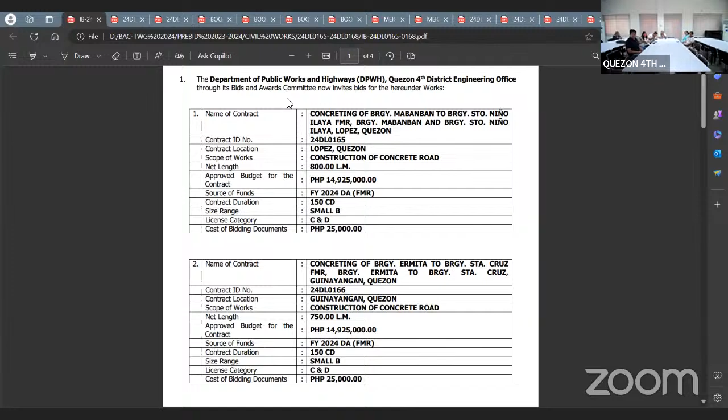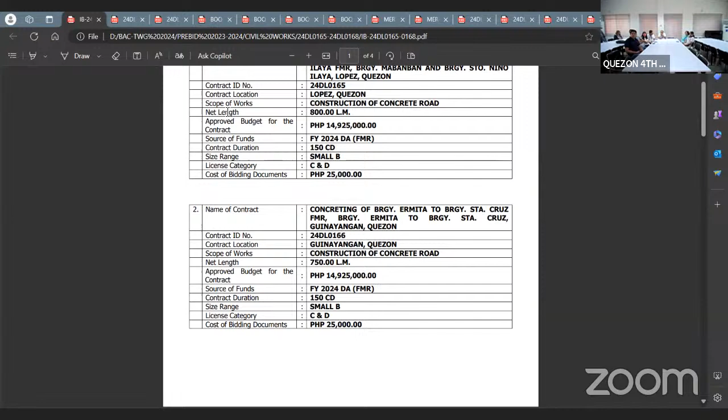Source of funds: FY 2024 FMR. This is FMR for the project. Duration of 150 calendar days, size range small B, license category C and D, cost of bidding documents of 25,000 pesos.

Then second project, 24-0166: concreting of Barangay Ermita to Barangay Sta. Cruz FMR, Barangay Ermita to Barangay Sta. Cruz, Guinayangan, Quezon. Construction of concrete road, length of 750 linear meters, approved budget for the contract of 14,925,000 pesos. Source of funds FY 2024 FMR, duration of 150 calendar days, size range small B, license category C and D, and bidding document of 25,000 pesos.

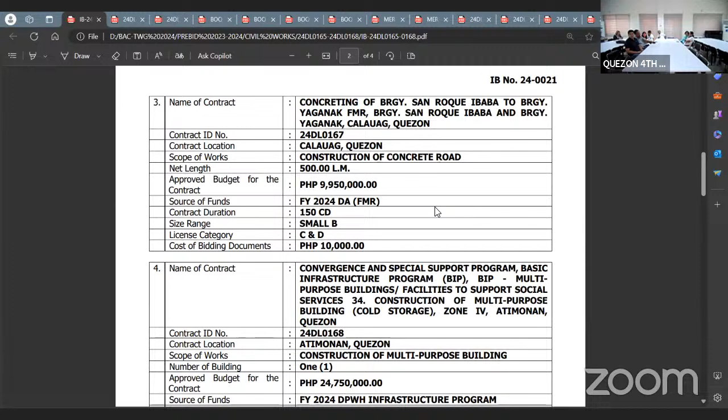Then third project, contract ID 24-0167: concreting of Barangay San Roque Ibaba, Barangay Yaganak FMR, Barangay San Roque Ibaba, and Barangay Yaganak, Calauag, Quezon. Scope of work: construction of concrete road, length of 500 meters, approved budget for the contract of 9,950,000 pesos. Source of funds FY 2024, DA, duration of 150 calendar days, size range small B, license category C and D, and bidding document of 10,000 pesos.

Then last project for this invitation, contract ID 24-0168: Convergence and Special Support Program, Basic Infrastructure Program, Multipurpose Building, Facilities to Support Social Services. Construction of multipurpose building, cold storage, for Atimonan, Quezon. Scope: construction of multipurpose building, number 1. Approved budget for the contract of 24,750,000 pesos. Source of fund FY 2024 DPWH Infrastructure Program, duration of 210 calendar days, size range small B, license category C and D, bidding document of 25,000 pesos.

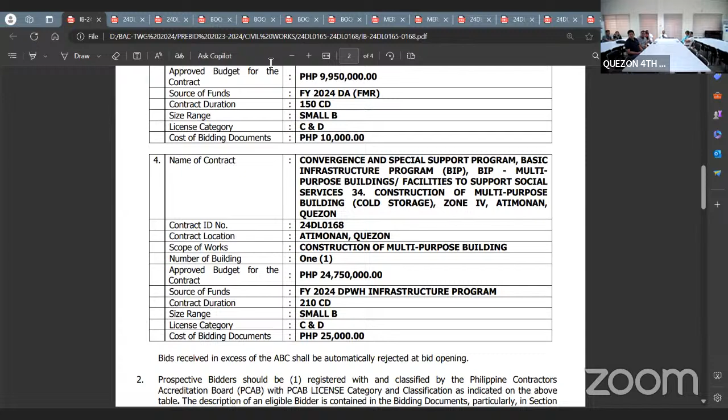Then let's proceed to category support. For our 4 projects for this invitation, 24-0165, 24-0166, and 24-0167, three projects are construction of concrete road. For their major category support, the requirement is road construction, PCCP. For other similar categories: road rehabilitation, PCCP, and road construction tunnel, PCCP. So the projects under the road construction category are 24-0165, 24-0166, and 24-0167.

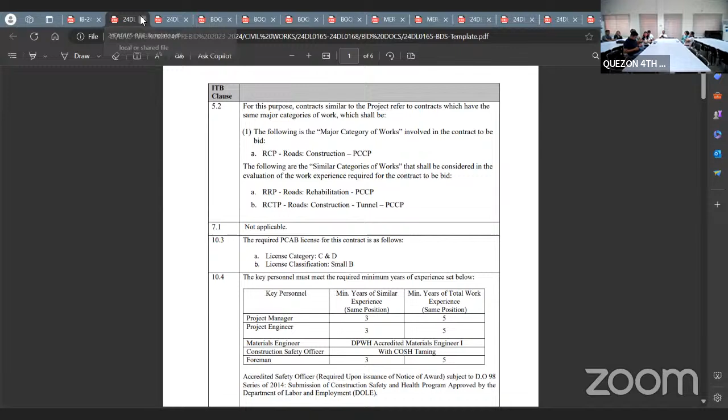Then for 24-0168, the major category of work is multipurpose building, building construction without piles, low rise concrete frame, 1 to 5 stories. For other similar categories of work: building construction with piles, high rise concrete frame, cast-in-place piles, 6 and above stories; building construction with piles, low rise concrete frame, cast-in-place piles, 1 to 5 stories; building construction with piles, high rise concrete frame, driven piles, 6 and above stories; building construction with piles, low rise concrete frame, driven piles, 1 to 5 stories; building construction without piles, high rise concrete frame, 6 and above stories; then building industrial low rise, medium rise, and high rise.

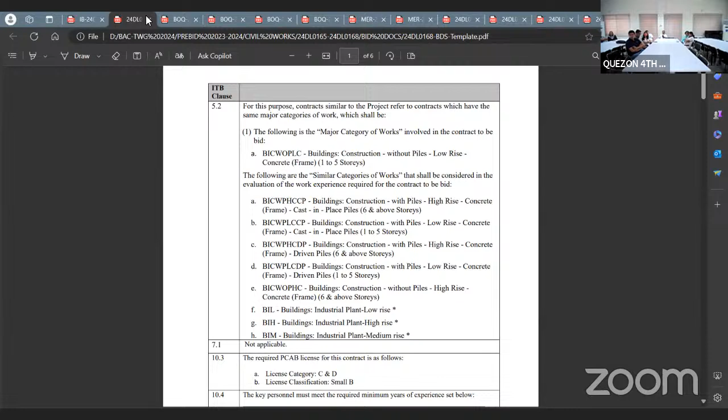For the BOQ of 24-0165, concreting of road length of 800 meters, summary of price: Part A - Facilities for the engineer. B - Other general requirements. C - Earthwork. D - Subbase course. E - Surface course. G - Drainage and slope protection structure. And H - Miscellaneous structures.

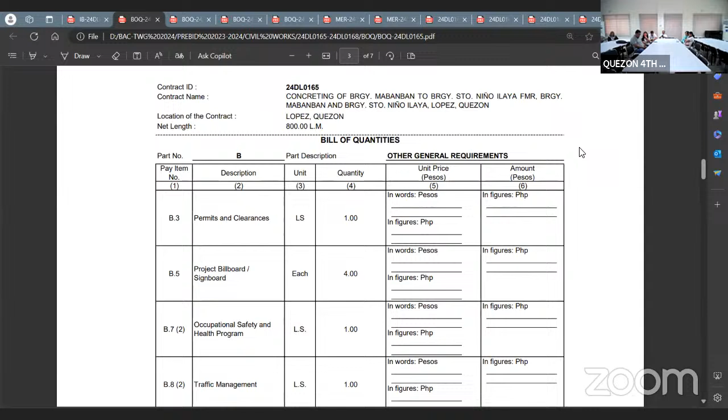So for Part A, we have provision of field office for the engineer, rental basis, provision of furniture, fixtures, equipment, and appliances for the field office for the engineers, provision of 4x4 pickup and service vehicle on a rental basis, and provision of progress photographs. Then for other general requirements, Part B: permits and clearances, project billboard signboard, occupational safety and health program, traffic management, and mobilization/demobilization.

Then for part C, earthwork: clearing and grubbing, surplus common excavation, embankment from roadway, structure excavation, common soil, subgrade preparation, common material.

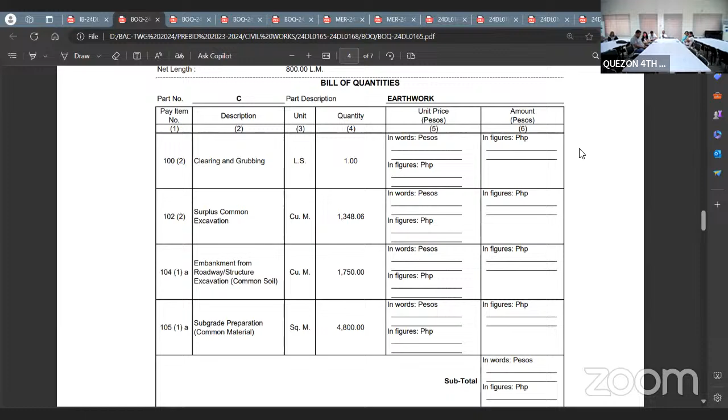Next part is sub-base and base course: aggregate sub-base course, polymer stabilized sub-base, and base course.

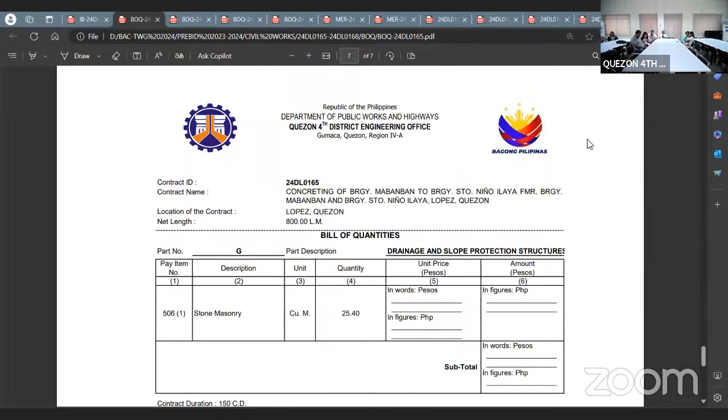Then part G for the drainage and slope protection structure: stone masonry. Then for the miscellaneous structure: kilometer post, precast.

Next, for 24DL0166, for the summary bid price: part A, facilities for the engineer; part B, other general requirements; part C, earthwork; part D, sub-base and base course; part E, for the surface course; and part H, for the miscellaneous structure.

So for part A, the provision belongs to the rental basis: provision of furniture, fixtures, and equipment, office for the field office for the engineer, provision for pickup service vehicle on a rental basis, and provision of progress photography.

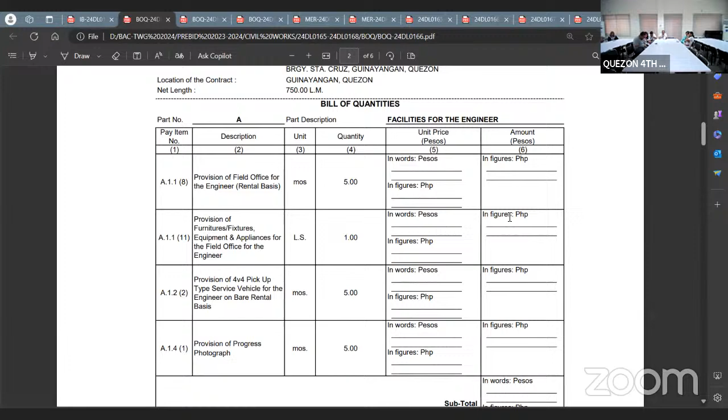Then next, part B: permits and clearances, project billboard/signboard, occupational safety and health program, traffic management, and mobilization/demobilization.

Then part C: clearing and grubbing, surplus common excavation, embankment from roadway, structure excavation common soil, subgrade preparation, common material.

Then part D for the sub-base and base course: aggregate sub-base course, and polymer stabilized sub-base and surface course.

Then part E, surface course: cement concrete pavement unreinforced, 0.20 meters, 14 days. Then for the miscellaneous structure: kilometer post, precast.

Next, third project, 24DL0167. Summary bid prices: part A, facilities for the engineer; part B, other general requirements; part C, earthwork; part D, sub-base and base course; part E, surface course; part G, drainage and slope protection structure; part H, miscellaneous structure.

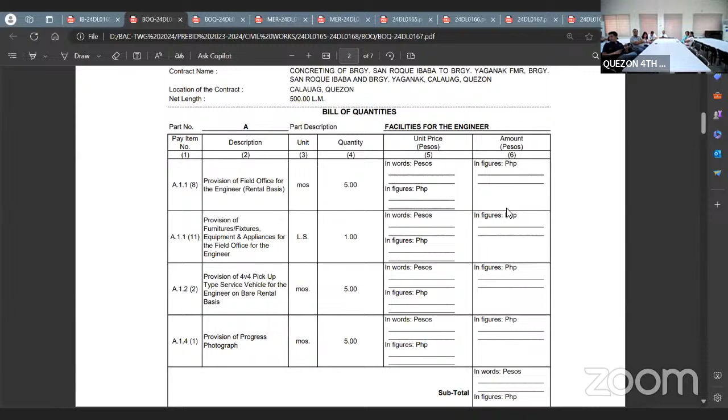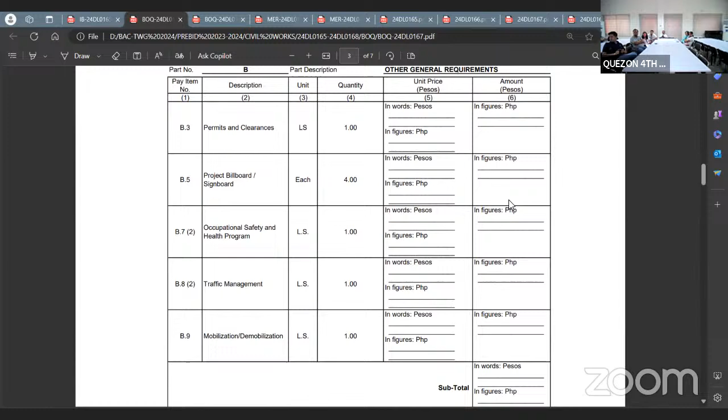So for part A, provision of office on a rental basis, provision of furniture, fixtures, equipment, and appliances for the field office for the engineer, provision of pickup service vehicle for the engineer on a rental basis, and provision of progress photograph. Then part B: permits and clearances, project billboard/signboard, occupational safety and health program, traffic management, and mobilization/demobilization.

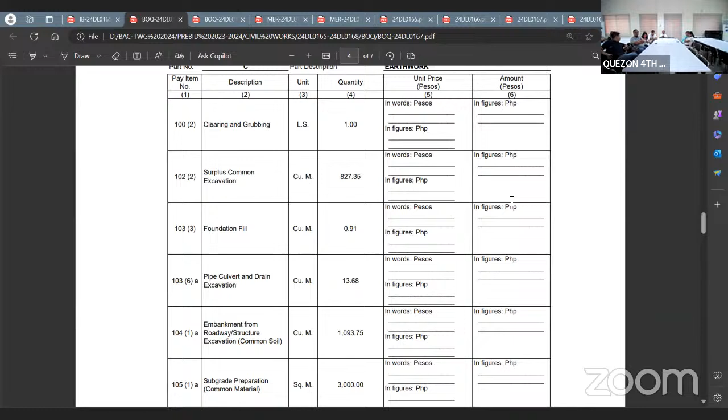Next, part C, for the earthwork: clearing and grubbing, surplus common excavation, foundation fill, pipe culvert and drain excavation, embankment from roadway, structure excavation common soil, subgrade preparation, common material.

And part D for the sub-base and base course: aggregate sub-base course, and polymer stabilized surface course. Then part E for the surface course: cement concrete pavement unreinforced, 0.20 meters, 14 days.

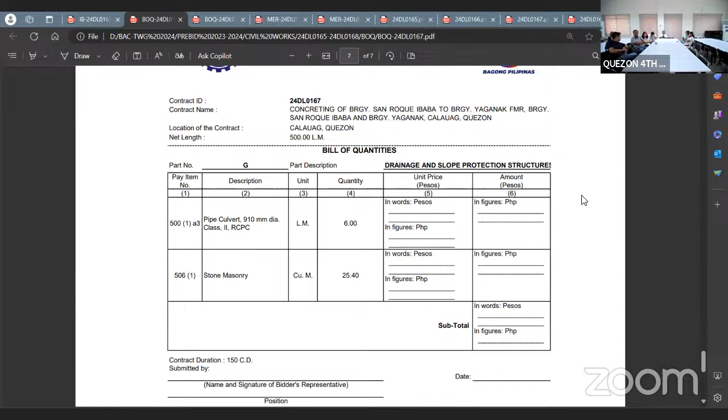Then for the drainage and slope protection structure, part G: pipe culvert 910 millimeter class 2, RCPC, and stone masonry. Then for the miscellaneous structure: kilometer post, precast.

And the last project, this is for the multi-purpose building, 24-0168. Summary bid prices: part A, facilities for the engineer; part B, other general requirements; part C, earthwork; part D, reinforced concrete; part E, finishing and other civil works; and part F, electrical.

Part A, facilities for the engineer: provision of office on a rental basis, provision of 4x4 pickup type service vehicle on a rental basis, and provision of progress photograph.

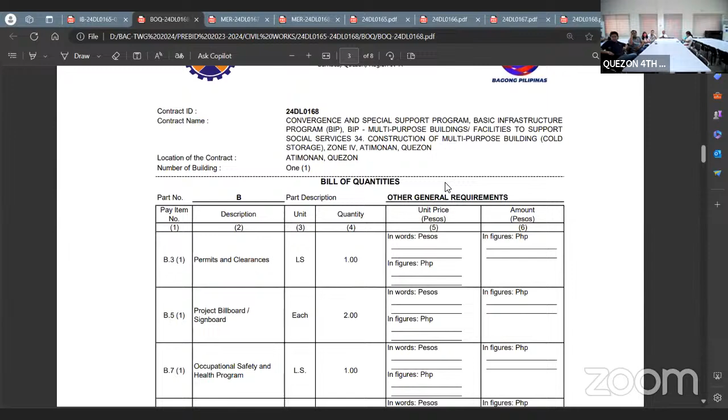Then part B: permits and clearances, project billboard signboard, occupational safety and health program, and mobilization/demobilization.

Then part C: clearing and grubbing, structure excavation common soil, embankment from roadway, structure excavation common soil, and gravel fill.

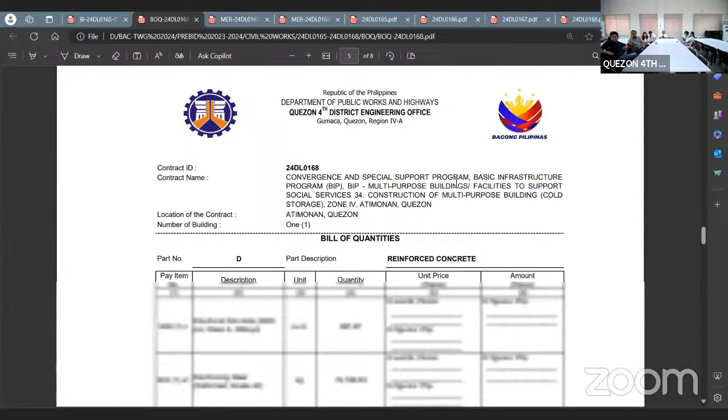Next, part D: structure concrete 3,000 psi class A, 28 days, and reinforcing steel grade 40, forms and falsework.

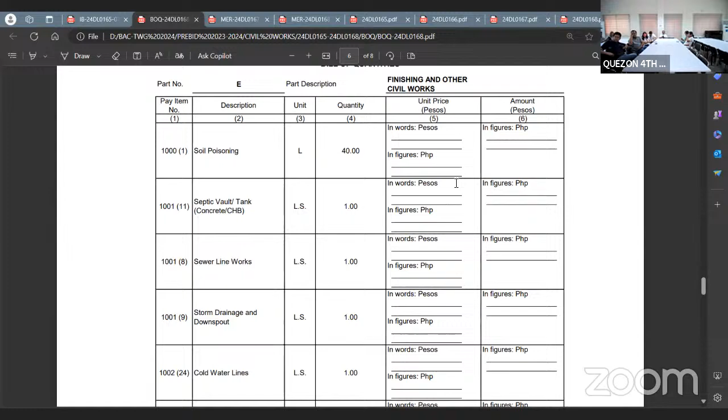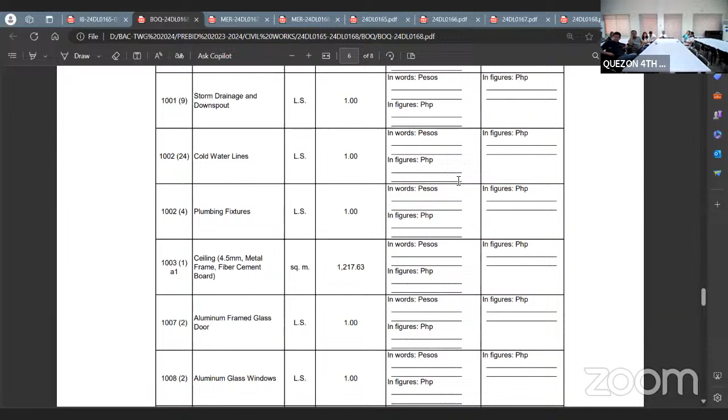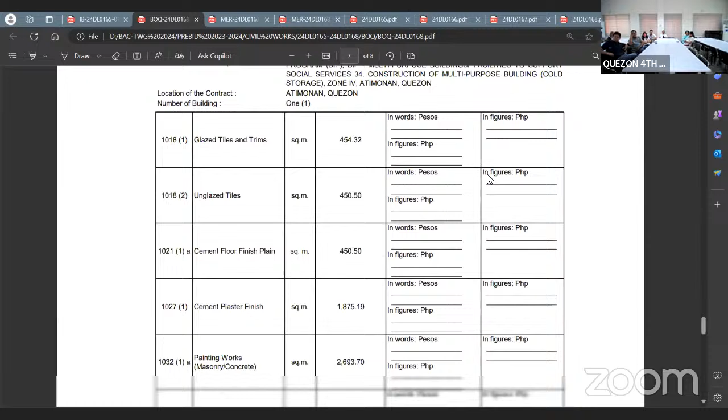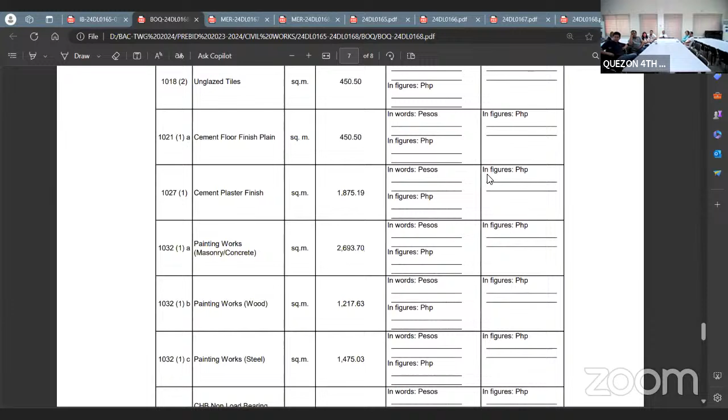The part E for the finishing and other civil works: soil poisoning, septic tank, concrete CHB wall, sewer line works, storm drainage and downspout, cold water lines, plumbing fixtures, ceiling works metal frame, fiber cement board, aluminum frame glass door, aluminum glass window, pre-painted metal sheets gauge 0.47 rib type long span, glazed tiles and trims, cement floor finish, plain cement plaster finish, painting works masonry concrete, painting works wood, and painting works steel.

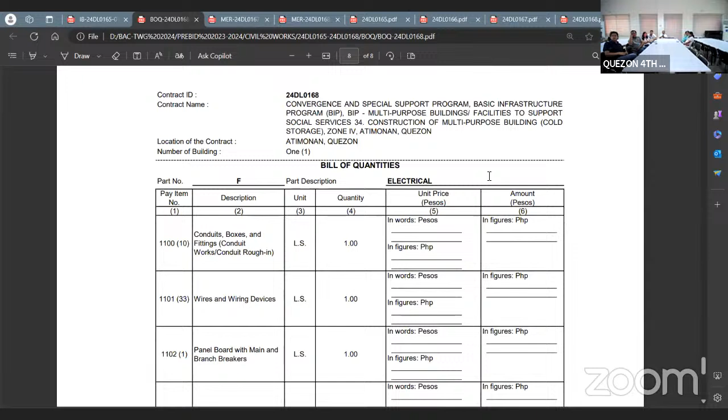Our next part F, electrical: non-load bearing works including reinforcing steel 150 mm, structural steel trusses, conduits, boxes and fittings, conduit works, conduit rough-in, wires and wiring devices, panel board main and branch breakers, and lighting fixture.

So yun lang po yung ating required for BOQ. And proceed po tayo sa minimum equipment requirement.

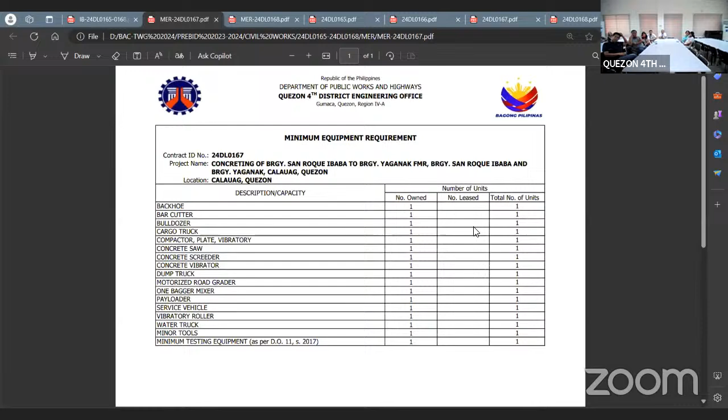Para po dun sa tatlong DE projects po natin, yung tatlong concreting approach, required equipment: backhoe, bar cutter, bulldozer, cargo truck, compactor, concrete saw, concrete screeder, concrete vibrator, dump truck, motorized road grader, one bagger mixer, payloader, service vehicle, and water truck, minor tools, and minimum testing equipment as per D.O. 11 series of 2017. Pare-pareho po yung ating concrete road requirement sa equipment.

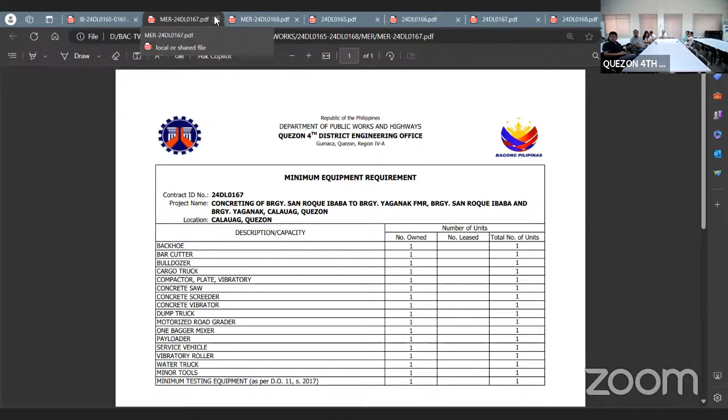Then for the construction of multi-purpose building, required equipment: backhoe, bar bender, bar cutter, bulldozer, concrete vibrator, crane, dump truck, one bagger mixer, payloader, service vehicle, compactor, pump root, stationary, welding machine, minor tools, and minimum testing equipment as per D.O. 11 series of 2017.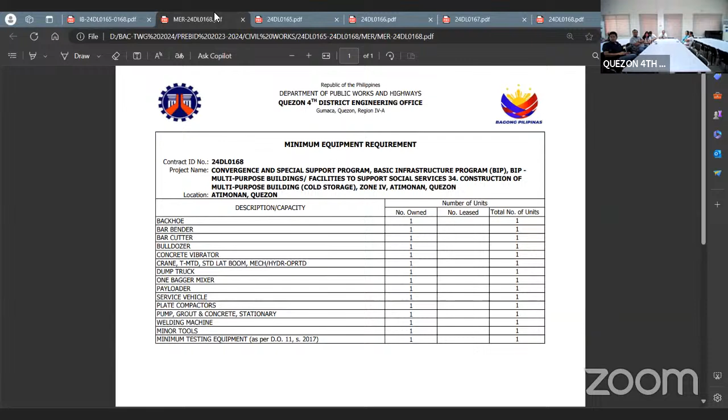Next, for the plan, for 24-0165, concreting of Barangay Mabanban to Barangay Santo Niño, Ilaya, FMR, Barangay Mabanban to Barangay Niño, Ilaya, Lopez.

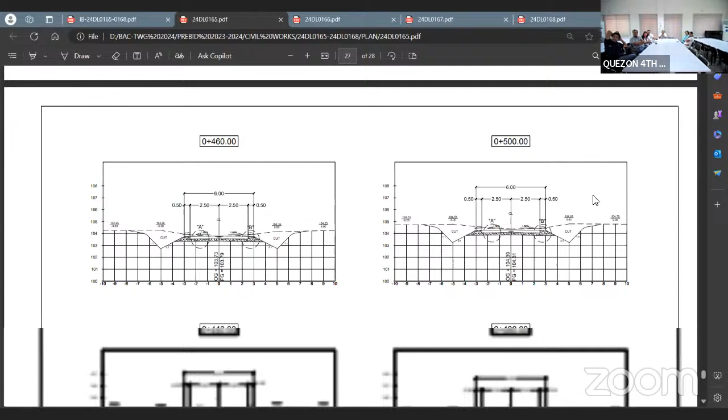Next, for 24-0166, concreting of Barangay Ermita to Barangay Santa Cruz, FMR, Barangay Santa Cruz, Guinayangan.

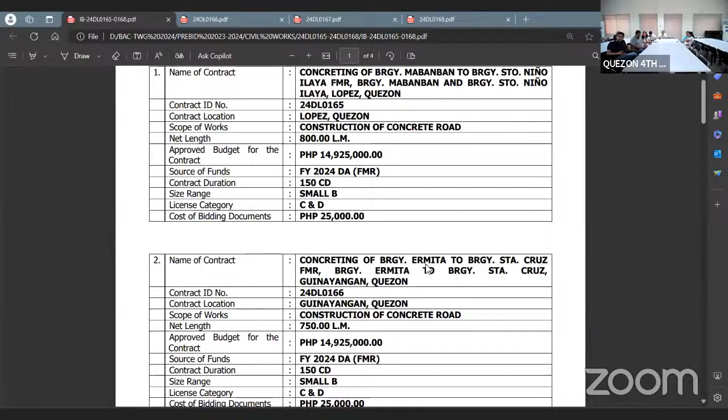Ano lang, pa-take note po, sa plan may unang po na barangay. Yan po, yung exact title po, Barangay Ermita to Barangay Santa Cruz, FMR. Kaso dun sa address po niya ay may Barangay Ermita pa po. So pa-take note lang po, para i-correct yung title dito sa plan. Wala na po itong barangay. Okay.

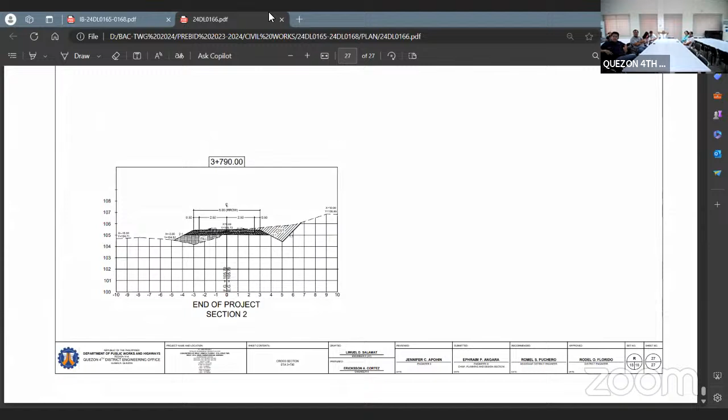For 24-0167, concreting of Barangay San Roque Baba, Barangay Yaganak FMR, Barangay San Roque Baba, and Barangay Yaganak Calauag.

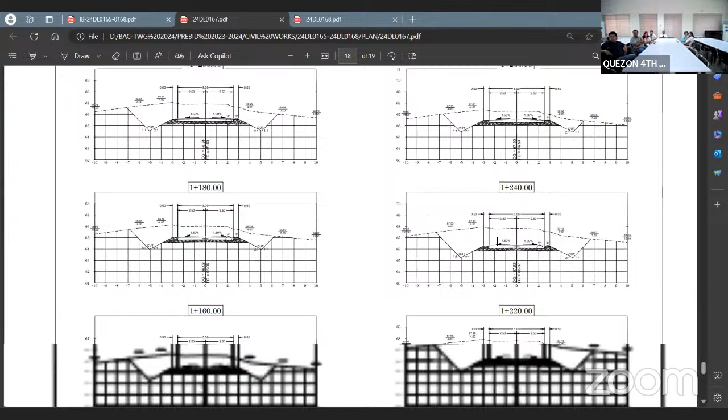And next, for the last contract ID 24-0168, construction of multipurpose building cold storage for Atimonan, Quezon.

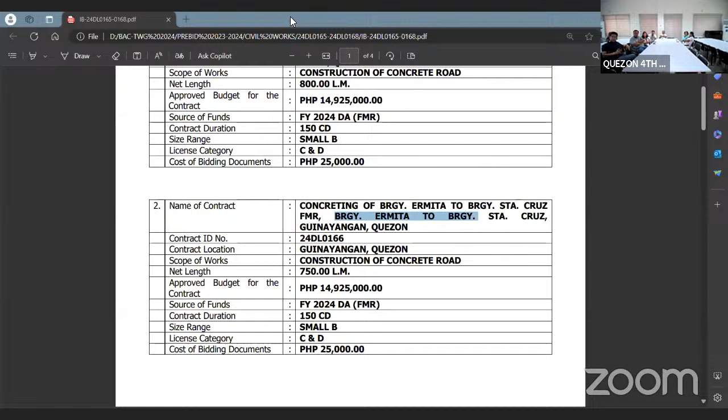And next, proceed with the other matters. Okay, number 1.

All notarized documents attached with documentary stamps, any missing documents ground for outright rejection of bid of the use the specified forms and paper sizes for the bidding documents. The required paper size po natin is A4. Kung meron pong pagination, your tags and label of content, o kung wala pong pagination, your tags and label of content, accept pa rin po natin yung document as long as ma-acknowledge po ng ating bidder na ganun yung pagkaka-process o pagkaka-package ng kanilang bidding document.

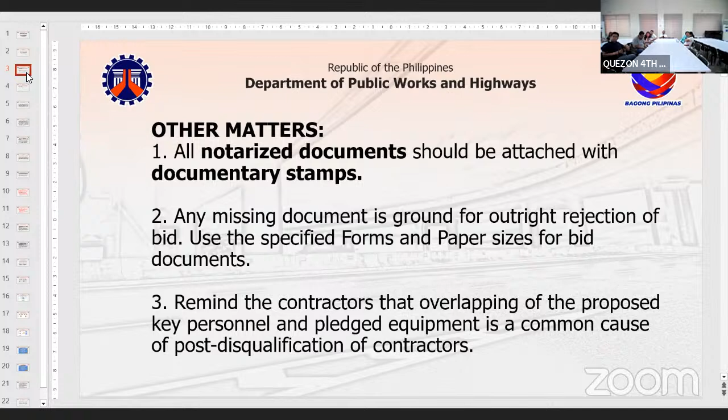Number 3, remind the contractors that overlapping of the proposed key personnel and pledged equipment is a common cause of post-disqualification of the contractors. So sa ongoing project, under DO 127 of 2018, if the proposed key technical personnel is employee of the bidder and working on other project at the time of bidding, the bidder shall submit a certification that 1, the personnel will be pulled out from the ongoing project once the bidder is awarded the contract, and 2, he will be replaced by another person with equal or better qualifications as certified by the head of the implementing office pursuant to the memorandum of 2012.

The proposed key personnel and replacement must be supported with documents. Both po yung ating proposed key personnel at replacement pareho po nakalagay sa ating technical list para po ma-verify din po pareho.

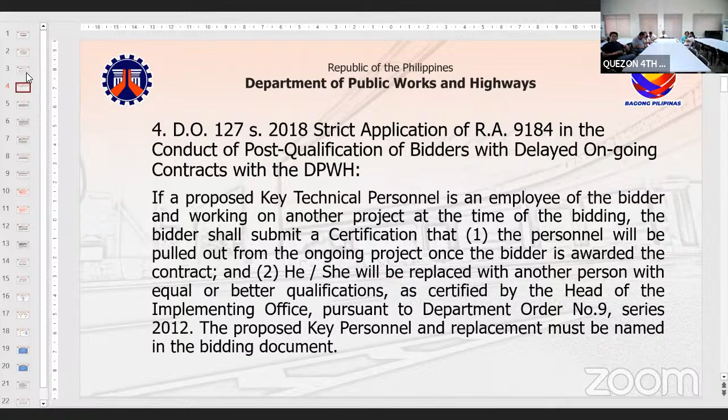At the time of the post-qualification procedure, if the BAC verifies at any time that the deficiency is due to the contractor's fault or negligence pursuant to Section 34.3 of the 2016 Revised Implementing Rules and Regulations of RA 9184, the procuring entity shall disqualify the contractor from the award without prejudice to the forfeiture of its bid security and the imposition of administrative, civil and criminal liabilities as may be applicable.

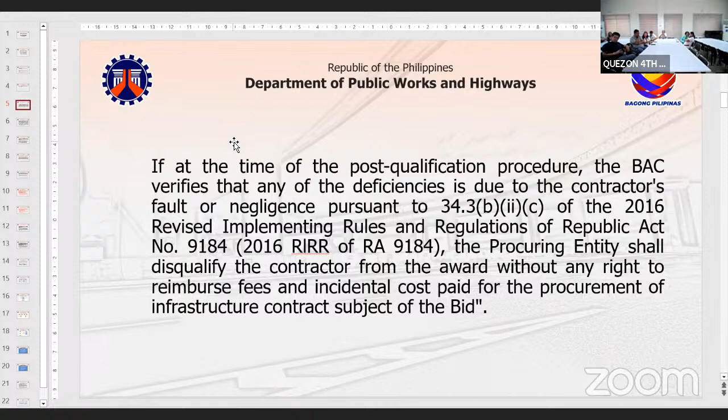Then, if the grounds for the post-disqualification is based on the above requirements, the concerned BAC shall issue a notice of post-disqualification to the bidder with the statement that the bidder shall not participate in any DPWH project until and unless the reason for the post-disqualification has already been cleared by the concerned implementing office upon the presentation of the required documentary evidence.

The concerned implementing office shall issue a certification if the contractor has already complied with the requirements and other duties.

However, this shall not delay the procurement process of the concerned implementing office in accordance with the periods provided under the 2016 Revised Implementing Rules and Regulations of RA 9184. So mag-verify po tayo dun sa mga defective deficiency, pero hindi po natin kailangan hintayin yung mga reply sa verification. Masusunod pa rin po yung prescribed schedule natin sa DPWH.

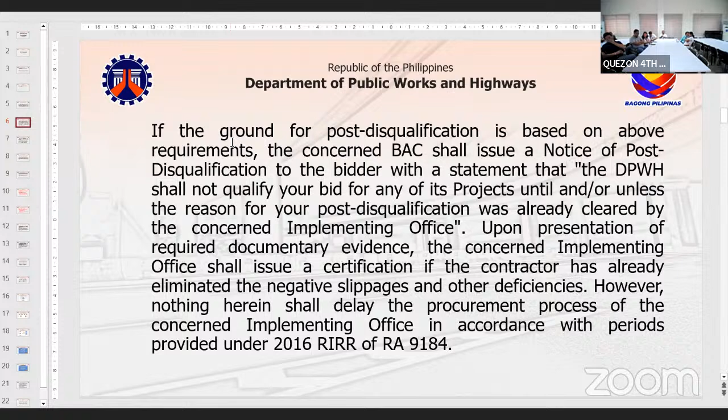Next, for the subcontracting, alam po, this is under DO 261/2022. Submission of bid documents will be on time. The conference room clock is designated as the official time. Late bids will not be accepted.

So bids must be duly received by the BAC Secretariat at the office for manual submission, or at the electronic bid portal at DPWH.gov.ph for the electronic submission, on or before 4/2/2024 at 10 a.m. So 10 a.m. po yung deadline ng submission. Then proceed po agad tayo sa bid opening.

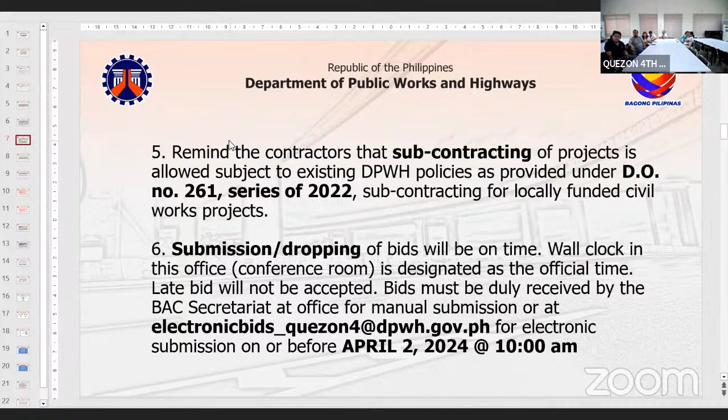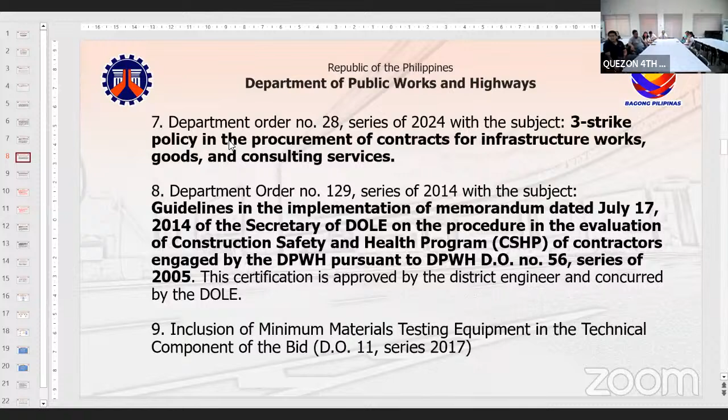Department Order 28/2024, this is for the bagong guidelines for the three-strike policy, the procurement of contracts, infrastructure works, goods and consulting services. Department Order 129/2014 for the CSHP. The minimum materials testing equipment as part of the technical component of bids under DO 11, series of 2017. Mayor's permit is part of the eligibility requirements. Department Order 133/2015 for the Precedence Diagram Method. Department Order 105/2020 for the policy directives on the transparency and accountability for procurement processes.

Yung latest po natin, Department Order 6/2024. All pre-bid conference and bid opening, naka-livestream po tayo dun sa ating DPWH Quezon 4th DEO YouTube official channel. Then for the bidders po na gusto mag-participate, sige din po sa ating BAC members na mag-participate via online. Paki-notify po yung office para mabigyan din namin kayo ng schedule.

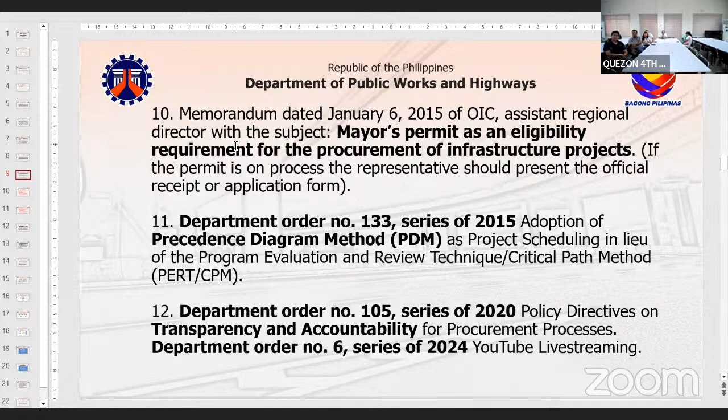For the bidders po na gustong mag-request ng site inspection, paki-coordinate na lang po at refer na lang po si Engineer Kevin, Engineer Ray for the schedule po or kung mag-request po ng site inspection. Note po na hindi po requirement na i-attend yung ating site inspection, pero pwede pong mag-request yung mga bidders para mas madali po silang makapag-estimate kung mapupuntahan po nila yung actual project location. All prospective bidders or their representatives must present their contract and information, CI, together with their company ID. Authorization letters should not be accepted.

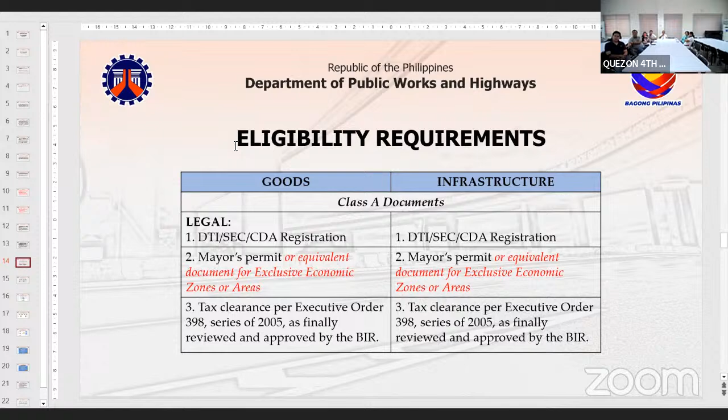For the bidding po natin yung eligibility requirements, DTI, SEC, CDA, mayor's permit, tax clearance, statement of ongoing contracts, statement of SLCC, license and registration, audited financial statement in NFCC. Then for the Class B documents, which po na mayroon tayong joint venture ID.

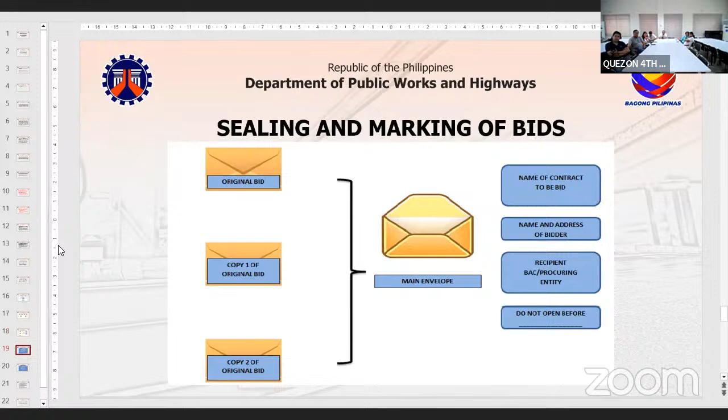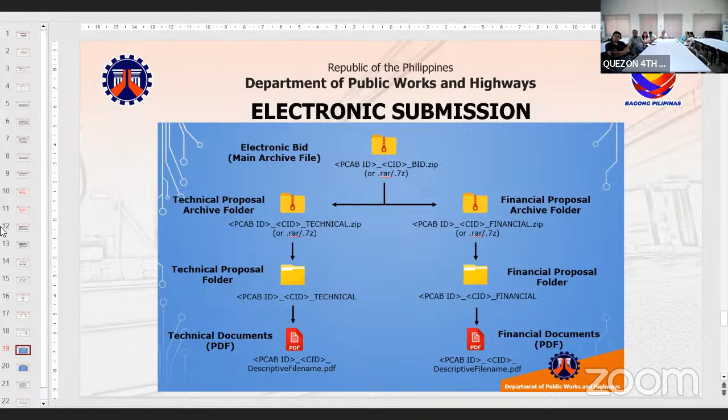Then for the electronic submission, this is under June 17, 2020. All files must be in PDF format and all folders must be password protected.

Any other questions? If you want, questions back.